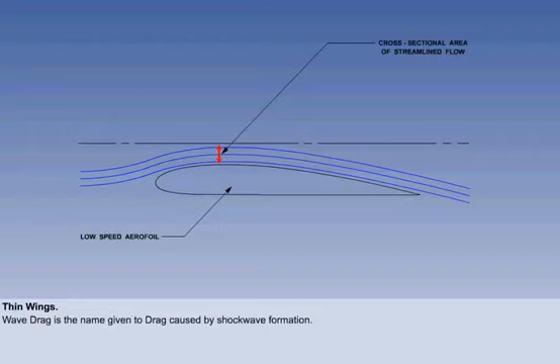There are several methods of increasing mcrit, the first of which is the thin wing section. A thinner wing increases the cross-sectional area of the streamlined flow. This results in a reduction in local velocity. Therefore, mcrit is increased.

Unfortunately, a thin wing has some disadvantages, namely, less lift is produced for a given angle of attack, the structural weight is higher, and there is an obvious reduction in the size of the fuel tanks. With these disadvantages in mind, the designers will provide jet transport aircraft with a wing as thin as is practical.

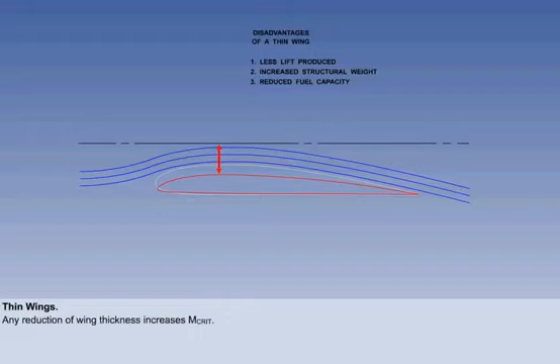A swept-back wing is the most commonly used method of increasing mcrit. Sweep forward would give the same benefit, but forward sweep is structurally unsound, so generally speaking, has only been used on a few experimental aircraft. Consequently, any references to a swept wing means swept back.

The only reason a swept wing is fitted to an aircraft is to increase the critical Mach number. A swept wing also has some associated byproducts, some favourable and some not, which we'll look at later.

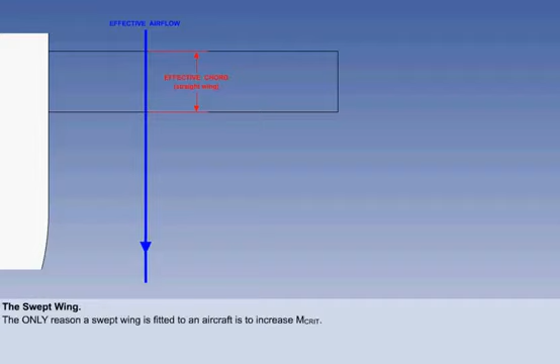Observe, the effective airflow passes over a straight unswept wing at 90 degrees to the leading and trailing edges, giving a certain effective chord. On a swept wing, the effective airflow passes over the leading and trailing edges at an angle, which gives an increase in effective chord. This results in a decrease in thickness chord ratio, which has the effect of increasing the length of the stream tube.

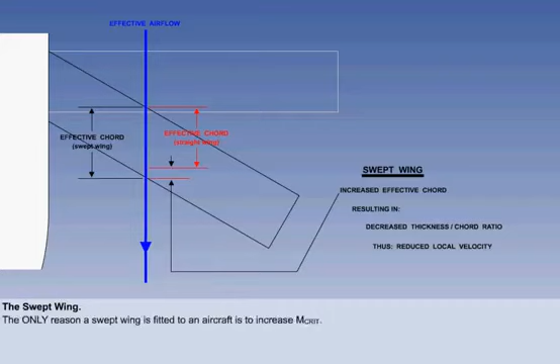Thus, the local velocity is decreased, and therefore mcrit is increased. And vice versa, anything which causes an increase in local velocity will decrease mcrit. For example, a downgoing aileron.

To illustrate some of the advantages and disadvantages of a swept wing compared to a straight wing, we can use the lift curve. A favourable byproduct of a swept wing concerns flight in turbulence. Here we can see an angle of attack that results in a certain lift coefficient. If a gust increases the angle of attack, the lift coefficient will increase.

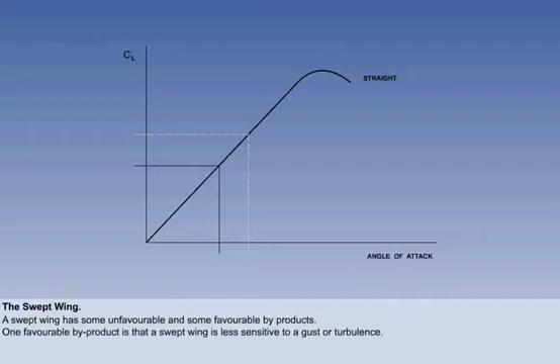If we now reset the graph, we can consider the lift curve of a swept wing for comparison. At the same angle of attack, the lift coefficient of the swept wing is less than that of a straight wing. But because of the reduced lift curve gradient of the swept wing, the same increase in angle of attack will result in a smaller increase in lift coefficient. Therefore, one of the favourable byproducts of a swept wing is that it is less sensitive to changes in angle of attack due to a gust or turbulence.

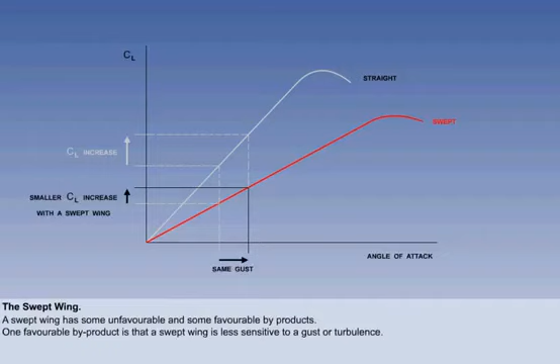Let's now consider an unfavourable byproduct of a swept wing. Illustrated is an angle of attack that gives the required lift coefficient from a straight wing. To obtain the same lift coefficient from a swept wing requires a higher angle of attack.

The disadvantage to an aircraft with a swept wing is that it must fly with a noticeably higher nose attitude at low indicated airspeeds. This complicates landing gear design, including the possibility of tail strike when taking off and landing, plus reduced visibility from the flight deck.

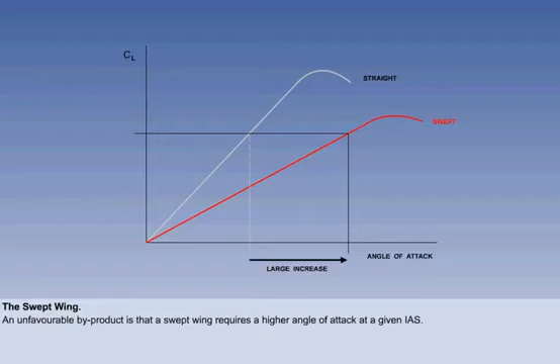Another unfavourable byproduct of a swept wing is that the maximum lift coefficient is reduced when compared to a straight wing. This results in a higher stall speed, thus increased takeoff and landing distances. The two major disadvantages of the swept wing, pitch up at the stall and Mach tuck, have been covered elsewhere.

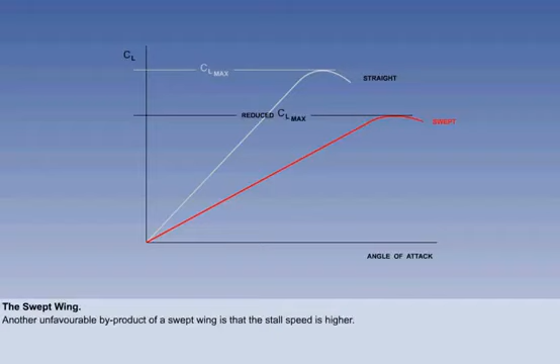We have seen that some of the problems of high-speed flight are associated with airflow separation behind the shock wave. As you learned when studying stalling, if the kinetic energy of the boundary layer is increased, separation will be reduced.

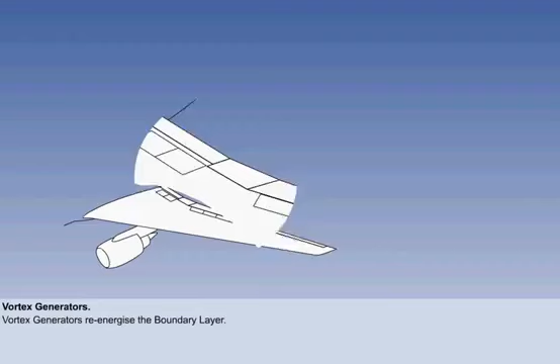Boundary layer kinetic energy can be increased if vortex generators are fitted. These are small blades projecting from the surface. Each blade generates a small but intense vortex, which re-energizes the boundary layer and reduces shock-induced airflow separation.

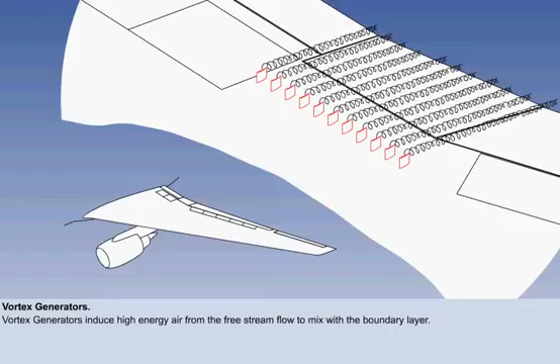A written exam question may use the wording, vortex generators induce high-energy air from the free stream flow to mix with the boundary layer. A further disadvantage of a swept wing is the reduced effectiveness of trailing edge control surfaces and high lift devices because their hinge line is swept.

Let's summarize the relevant facts about a swept wing. Its purpose is to increase the critical Mach number.

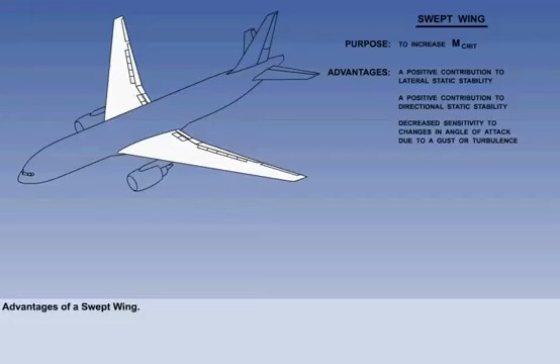Its advantages are: it gives a positive contribution to lateral static stability, a positive contribution to directional static stability, and decreased sensitivity to gusts and turbulence.

Its disadvantages are: pitch up from its tendency to tip stall, with the attendant possibility of deep stall or superstall, Mach tuck, a higher stall speed and consequent increased takeoff and landing run,

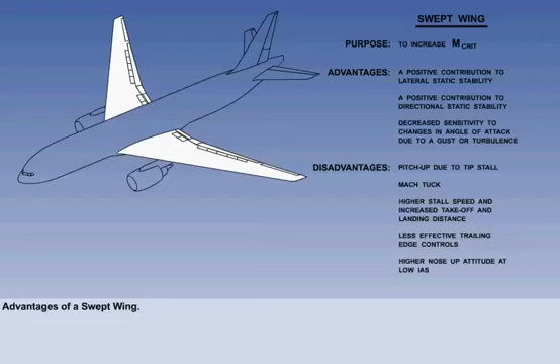less effective trailing edge control surfaces, particularly the trailing edge flaps, and lastly, a higher nose-up attitude at low indicated airspeed.

Just as a matter of interest, the sweep angle for a jet transport aircraft is approximately 30 degrees, measured from the quarter chords line to a line perpendicular to the root chord.

Our study of shock waves has concentrated on those on the wing, usually the place where supersonic flow first occurs. But a shock wave will form wherever the local velocity exceeds Mach 1.

There will be a local airflow acceleration wherever the cross-sectional area of the streamline flow is reduced. So, at transonic speed, there will be shock waves at various locations on the aircraft, in addition to those on the wing.

Wherever there is a sudden change in the cross-sectional area of the aircraft, from nose to tail, shock waves will form and add to the wave drag of the aircraft.

To minimize wave drag, there is an ideal rate of change in cross-sectional area of the whole aircraft, from nose to tail, which is called area rule.

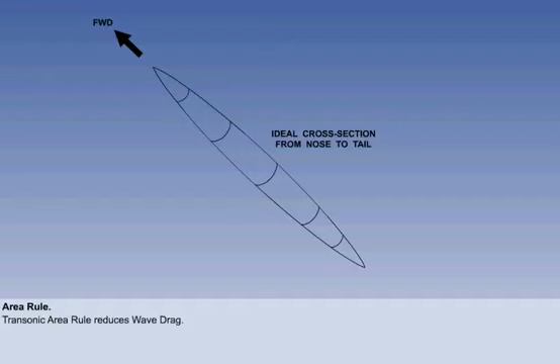But this shape is not practical because of the need for a wing, tail surfaces and engines, which will unfortunately give rise to sudden changes in the cross-section.

Aircraft must be carefully designed so that items with a large cross-section, like the wing, are positioned at the narrowest area of the fuselage, and that the cockpit, tailplane, engines and other bumps are spread out along the fuselage.

For aerodynamic and other reasons, the ideal area rule is not possible, but by clever design a good compromise can be achieved.

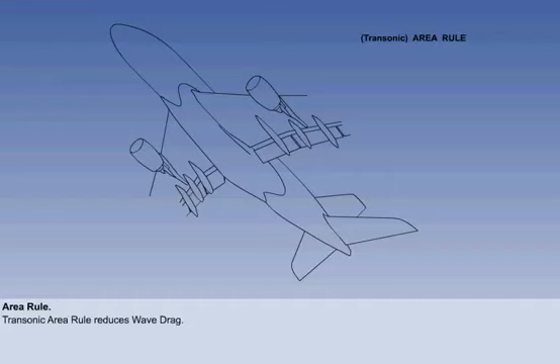Engine position can be optimized. Even the swept wing helps with area rule.

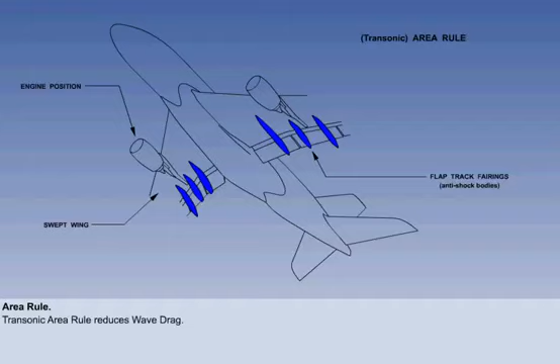Flap tracks and their operating mechanisms have to be streamlined, but the shape and length of the fairings is optimized to take advantage of area rule.

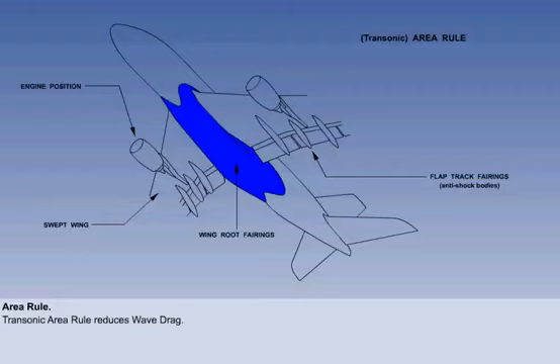But by far the greatest contribution to area rule is the design of the wing root fairings on modern jet transport aircraft. The designers of military aircraft don't have to make so many compromises with area rule as do the designers of transport aircraft.

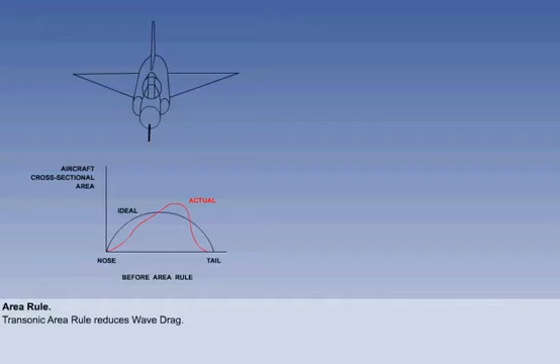When area rule is incorporated in the design, the actual distribution of cross-sectional area is much closer to the ideal, and consequently, wave drag is minimized.

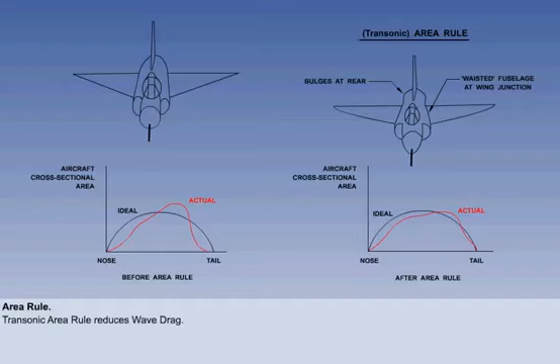You can see that the designers have reduced the cross-sectional area of the fuselage where the wing is attached. This is obviously not possible on a transport aircraft.

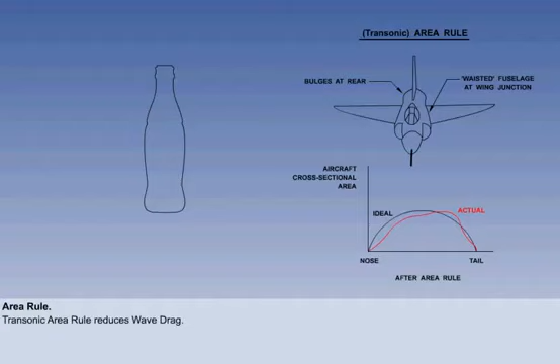A waisted fuselage resembles a conventional Coke bottle, and you may see references to Coke bottle shape in questions relating to area rule in the written exam.

When compared to the conventional, the supercritical section has a blunt or well-rounded leading edge, greater thickness, a flat upper surface, and a thick trailing edge.

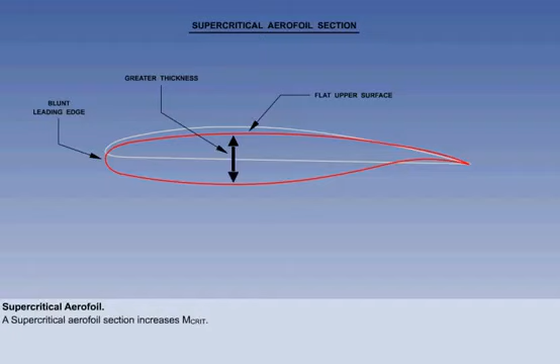Because the airflow doesn't accelerate as much over the flat upper surface, the formation of shock waves is delayed to give a higher M-crit, and the shock waves are much smaller and weaker when they do form.

So the advantages of the supercritical over the conventional section are less sweep angle required, greater stiffness, and greater fuel capacity.

The extra fuel capacity will allow a greater payload to be carried over the same distance, or the same payload over a longer distance.

The disadvantages of the supercritical over the conventional section are more complex high-lift devices are required, there is more trim drag, and if the aircraft experiences high-speed buffet, any oscillations will be more severe.

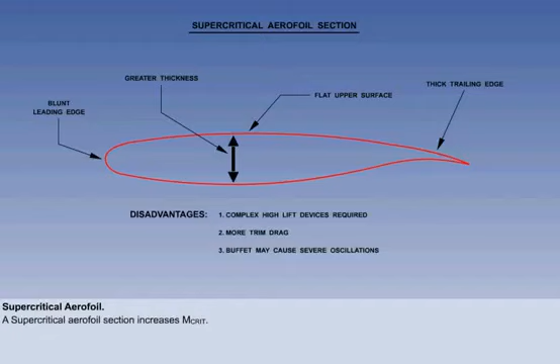None of the disadvantages outweigh the advantage of a higher critical Mach number. So all jet transport aircraft will have a wing with a supercritical section.